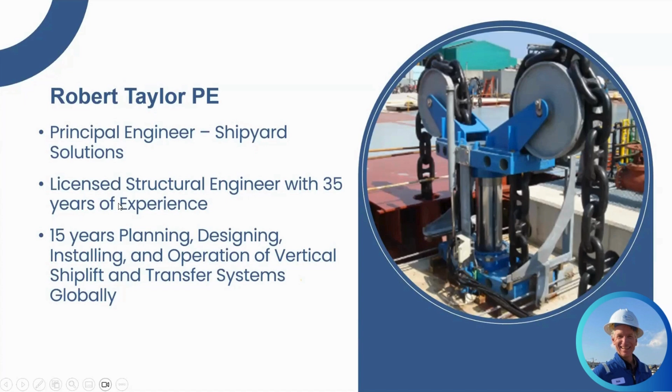Maritime support infrastructure is both a strategic and economic asset for Canada and many other countries. This capability is essential for construction, maintenance, and repair of both government and civilian ships. We are seeing increasing global investment to support ship construction and maintenance.

This demand is driven by many factors: increased focus on national security, reshoring of vessel construction and sustainment capability, renewable energy transition, efforts to reduce carbon emissions, offshore energy production moving to new and less developed regions, including Namibia, Africa, and Guyana, South America, the global expansion of aquaculture, the shift towards fewer and larger commercial fishing vessels operating further from home ports to serve global markets, and the demand for more and larger leisure and cruise vessels.

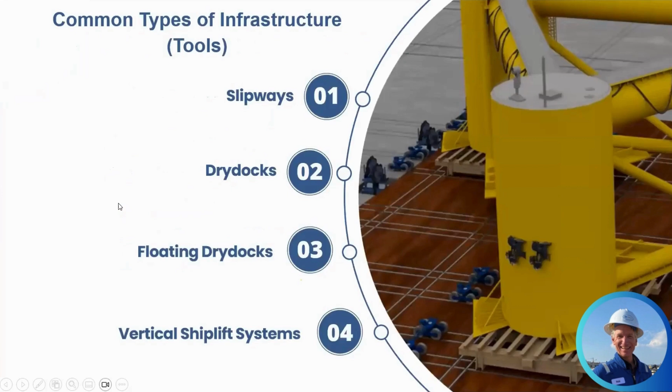Infrastructure or tool. Ship handling systems are sometimes referred to as tools. I first encountered this terminology at La Ciotat Shipyards, where we installed the Atlas shiplift system. Ship handling systems are a class of infrastructure that is designed and built for a very specific purpose. Central to the success of any nation to achieve maritime economic goals is modern shipyard infrastructure.

Ship launch and retrieval technology includes slipways, drydocks, floating drydocks, and vertical shiplift systems. Understanding the available technologies, capabilities, timescales, and budget for these infrastructure projects is necessary for success.

The maritime industry faces many challenges. There's a shortage of experienced engineers due to the cyclical nature of investment in this class of infrastructure, and siloing of information resulting from the compartmentalized nature of vessel design, infrastructure development, and shipyard operations. Workforce development is necessary to staff and run sustainment facilities.

Bardex has adopted an open engagement policy to address these industry challenges. The goal is to build communication between all industry stakeholders, including vessel designers, shipbuilders, refit facility operators, and operations experts known as dockmasters or shipwrights.

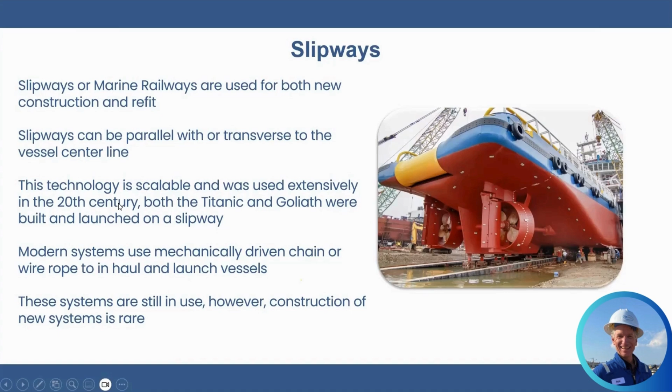Slipway operation is generally tide dependent. Maintenance dredging around the submerged civil works is a challenge, and failures have occurred with this technology.

Dry docks are another common type of shipyard infrastructure. These systems typically handle larger vessels. The trend is to modify existing large dry docks with intermediate gates and lift-in, lift-out capability to increase throughput without performing a complete evolution. Dry docks can be retrofitted with vertical shiplift systems in situations where reactivating the dry dock is not commercially viable.

Economic viability is a challenge, especially for older dry docks. We will discuss examples later in the presentation. Dry docks are tide independent. Weather, however, can be a factor for floating gate operations.

The CapEx and OpEx costs are high. New construction in developed economies is limited by available space, cost and schedule for permitting, design, and construction, and environmental concerns affecting both construction and operations. The transition to block module assembly has greatly reduced new vessel construction inside of dry docks. Safety is an issue - failures resulting in deaths, injuries, and asset losses have occurred.

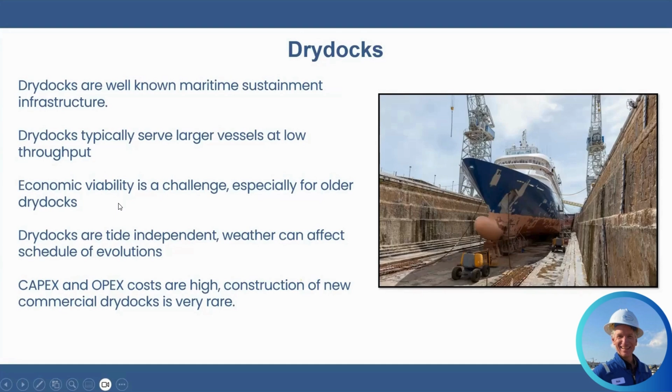Floating dry docks are the most common tool for launching newly built vessels and performing sustainment. This technology is less expensive to plan, construct, and deploy from a civil perspective. Where onshore space for dry berths is not available, this type of floating system is a solution.

FDD purchases, interestingly, are easier to finance because the asset can be repossessed in the event of a default. Floating dry docks do not require extensive civil construction to support installation and operation, bypassing some coastal development regulatory challenges.

However, FDD vessels themselves are expensive to design, build, and operate. Operating this infrastructure requires a high level of training and experience. These are classed as ships and require regular maintenance and class inspections. A method for sustaining the asset is an important consideration when evaluating this technology.

The design consists of steel ballast tanks that are vented to the atmosphere. Seawater is pumped into and out of the tanks to ballast the vessel up and down. This design leads to corrosion issues, accumulation of sediments in the ballast tanks, and ballast water management concerns.

Performing ship repair and maintenance on a floating structure can lead to release of pollutants into the environment. Floating dry docks also have a history of failures, including capsizing due to stability issues, structural rupture resulting from improper ballasting and/or poor maintenance practices, and pump and valve failures resulting in sinking. Weather, tides, and water depth often limit operational windows. Ballasting during shore transfer operations is a very slow and delicate process.

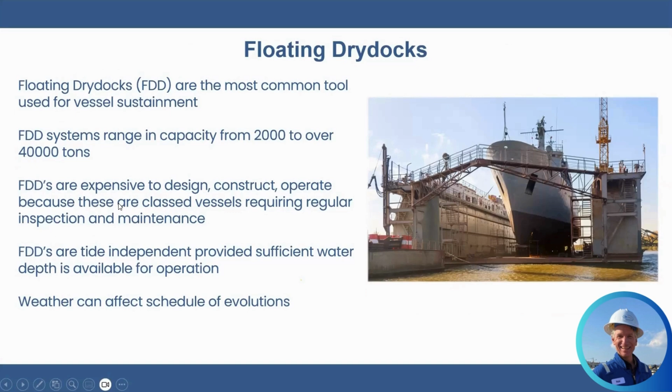Vertical shiplift systems provide high-volume ship handling at a lower CapEx and OpEx cost than dry docks. These systems are tide independent and can be operated in a broad range of weather conditions. Servicing vessels on shore reduces risk of pollution. Modern shiplifts have capacities from about 1,500 to over 27,000 tons.

Capacity is not limited by technology. Lifting and launching larger vessels is possible. However, finding locations with adequate onshore space and deep water access for vessels over 150 meters and longer are limited.

Shiplift systems provide the most economic benefit when connected to a large hardstand area capable of hosting many vessels concurrently. This makes this technology ideal for 60 to 150 meter vessels. Large dry docks and FDD units struggle to serve the small to mid-size vessel market cost efficiently.

Vertical shiplifts have been in continuous use since 1827, when John Blackwood, a Scottish engineer, built the first screw dock in New York. Two more systems followed in Baltimore and Philadelphia. There's only one surviving example of this technology, located in Bridgetown, Barbados - a 1,200-ton system with a 46 by 240-foot wood and steel truss platform. This system operated continuously from 1893 to 1984.

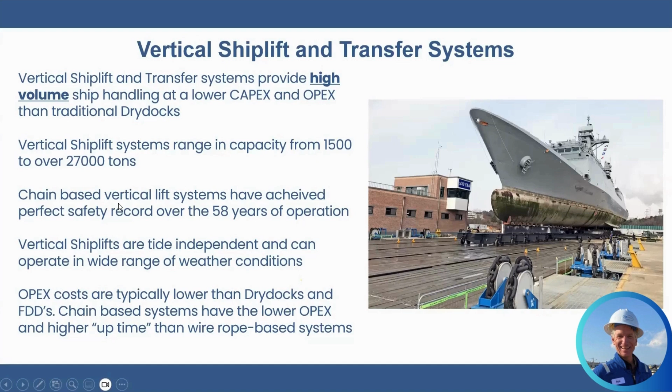Current market activity and trends indicate shiplift systems are the future. 4 SIOP projects are underway in U.S. Navy yards to refurbish or replace legacy dry docks that are no longer fit for purpose. These facilities are intended to service nuclear vessels. Costs are measured in billions of dollars, and these projects take a decade to plan and complete. We are aware of one large FDD replacement underway in the United States, a 58,000-ton capacity unit at a cost of around $200 million.

In the last few years, 5 North American commercial shipyards have invested in new shiplift systems. 4 of these systems bypassed a competitive tender process. I believe the industry will benefit from fully investigating all technologies before making such an important decision. We advise clients to evaluate all available options before selecting infrastructure that will support future operations for 3 to 5 decades.

Bardex is participating in 2 legacy dry dock reactivation projects. Both projects involve facilities that were built during the World War II era that have struggled to remain viable as commercial enterprises. We expect this trend to continue and have developed new products and capability to support it. Bardex recently introduced innovative solutions such as the OmniDock floating shiplift system and the OmniLift dry dock retrofit system. The objective is to reduce CapEx costs, shorten implementation schedules, and cost-effectively repurpose legacy infrastructure.

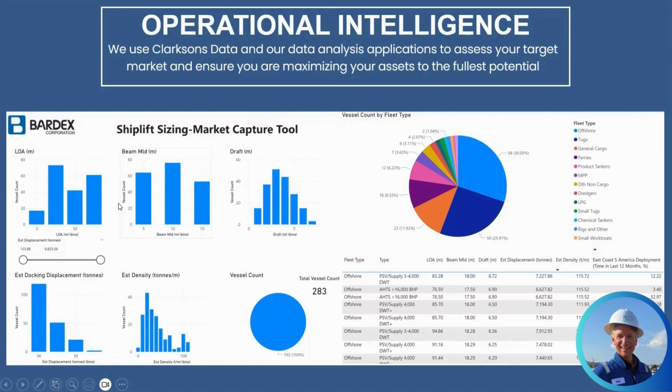Civil construction is the largest cost component of a vertical lift system. Engaging with the civil design team to plan the foundation and topside civil works creates the opportunity to optimize lift station capacity and spacing to match foundation capacity. Providing early, accurate equipment loads enables the civil designer to proceed with the foundation design efficiently.

Shiplift platforms are large and heavy steel structures. Engaging with the construction team enables the shiplift system designer to leverage equipment and capability that are available in the region. EPC planning requires extensive outreach to the local business community to identify capability that can be leveraged to install the system. This also builds future maintenance capability simultaneously.

Ship handling systems are tools that enable shipyards to operate efficiently. The system design must consider the workflow of the facility. Engaging with shipyard operations and facility staff ensures the system will achieve operational objectives.

Vessel designers provide blocking plans as part of the vessel design. These plans are focused on hull pressure and make assumptions about blocking support that may not be compatible with the technology used to launch and retrieve the ship. Blocking plans can be adjusted during the design process to ensure adequate load distribution. Life cycle loading analysis can be performed to ensure the sustainment infrastructure supports vessel maintenance through to decommissioning.

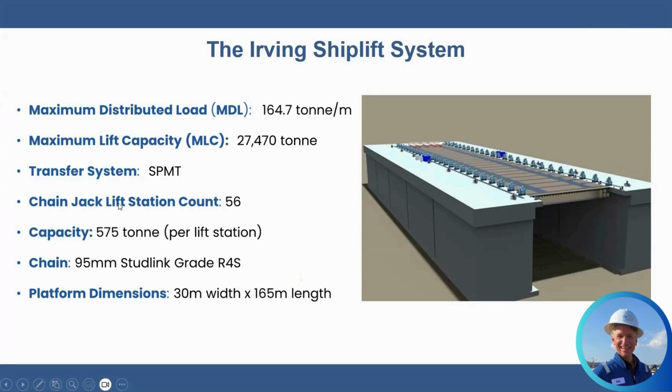The design of the ISI shiplift system began with the delivery of detailed vessel metrics and a blocking plan from the ship designer. This information is integrated into an FEA model for the shiplift system to test the blocking loads, ship support structure, platform, and lift stations.

This is an iterative design process focused on identifying and resolving any risk to the vessel or the shiplift system. Various loading conditions are considered during the analysis process to ensure the vessel can be lifted at all levels of outfitting.

The River Class Type 26 hull configuration necessitates a substantial stern overhang beyond the last keel block. This results in a load concentration at the stern block.

An area of focus for the design team is to eliminate the need for support aft of the keel blocking, which would interfere with docking the vessel. The goal is to be able to dock and launch the vessel safely and quickly.

The addition of 3 dry berth areas prepares the facility to host these and other vessels for future refit and maintenance work without disrupting new vessel construction.

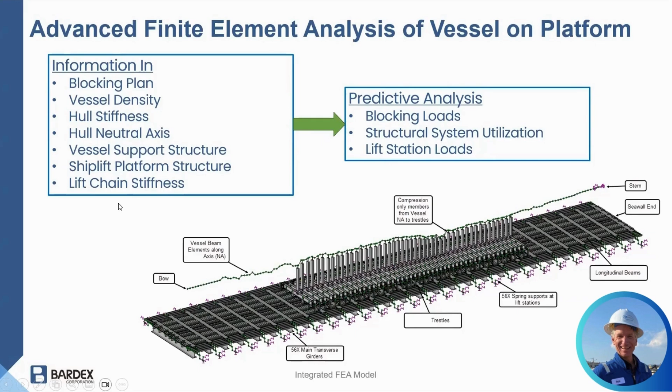This analysis technique can be used for any vessel entering this facility or any other Bardex shiplift system. The dock masters at ISI and other facilities have a responsibility for the safety of the vessel and personnel during launch and retrieval operations. Our role is to provide engineering support to these professionals.

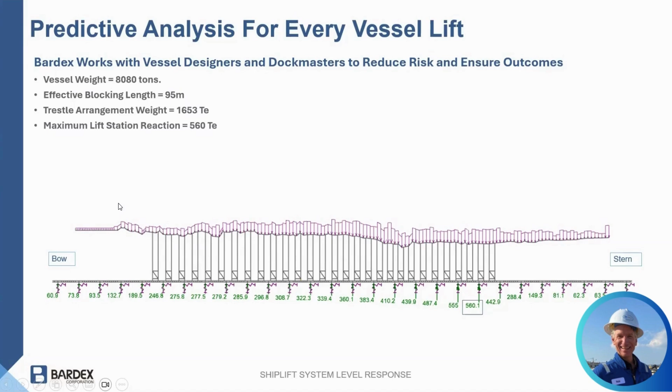We recommend performing this type of analysis when one or more of the following conditions are encountered: the facility is launching or retrieving a vessel for the first time; vessel or blocking plan data is incomplete; the vessel weight or density exceeds 80% of the system capacity; the vessel has unusual hull features that affect the blocking plan; or vessel alterations are planned during refit that will change the blocking plan.

To recap, there are 4 technologies commonly used for ship handling. Of these, shiplift systems connected to multiple onshore hardstands are becoming the industry standard, due to the ability of this tool to work at higher volumes and perform multiple functions.

Dry dock construction has become prohibitively expensive, relegating this technology to defense-related government-funded applications. Legacy dry docks are being reactivated, and there is an opportunity to modernize legacy facilities to improve commercial viability by retrofitting them with shiplifts, intermediate gates, and lift-out capability.

Use of advanced manufacturing and assembly processes for ship construction have fundamentally changed how shipyards are designed, enabling distribution of work over regional facilities and avoiding lengthy and expensive expansion of operating facilities. Equipping these facilities with vertical lift technology further supports this trend.

Advanced FEA and data analytics are new tools Bardex is introducing to shipyard design and operations to improve safety and increase efficiency. The need to rapidly scale up capacity means that professionals like myself must reach across boundaries and learn from other industry stakeholders to understand how to better serve the industry.